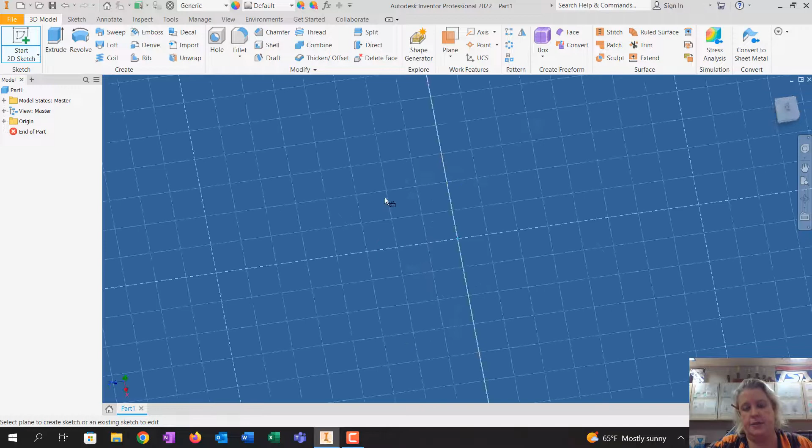So I'm going to do start 2D sketch. I'm going to pick the XZ plane, which is the top plane. I'm going to draw the top circle that makes this thing, and it is a 1 3/4 inch diameter. So I'm going to dimension this to 1.75, and I'm going to finish the sketch.

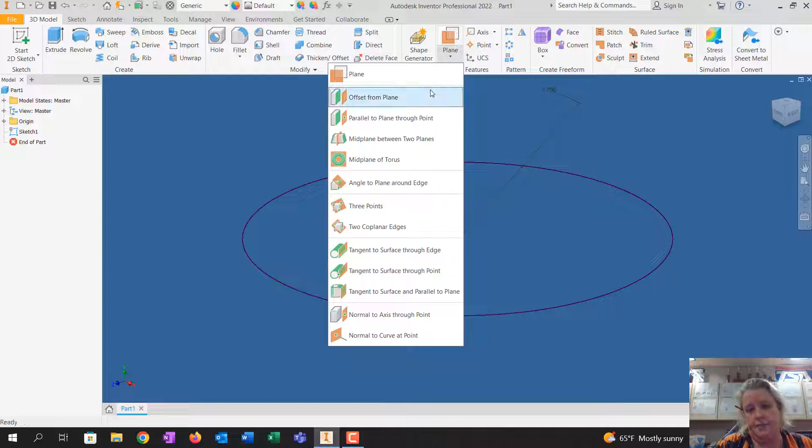Now I'm going to click on plane, offset from plane. I'm going to come to the origin and find that XZ plane. Notice the arrow wants it to go up, but I want it to go down, so I'm going to do negative. The height of this thing is 1 1/4, so I'm going to type that in. And notice here the plane is below it.

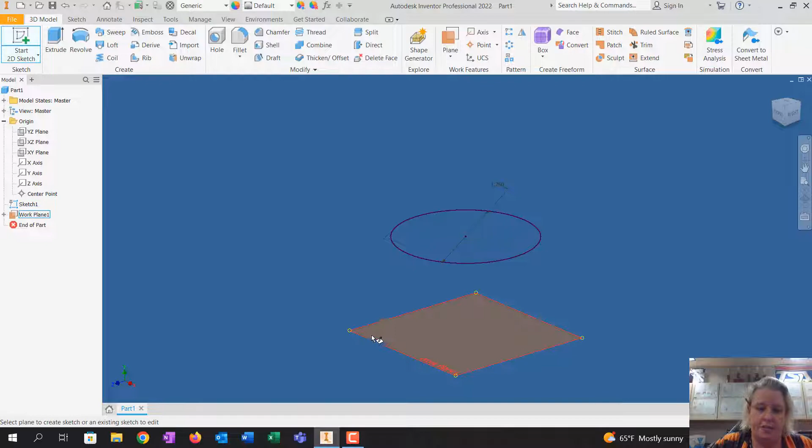Start 2D sketch, make sure you catch the edge of your work plane. Go ahead and project geometry by clicking on project geometry and that circle, and now you can share that center point. Find the green center point, draw your circle. And the diameter of the bottom circle is 7/8.

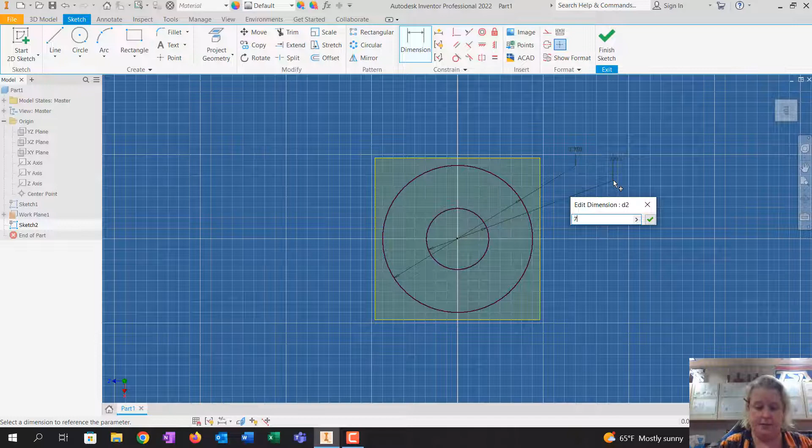We're going to finish the sketch. We're going to click on loft. I'm going to click the top circle and the part inside it so it highlights, then I'm going to click to add. I'm going to click the bottom one and just the center part, and tell it OK. And now I have that cone shape that I need.

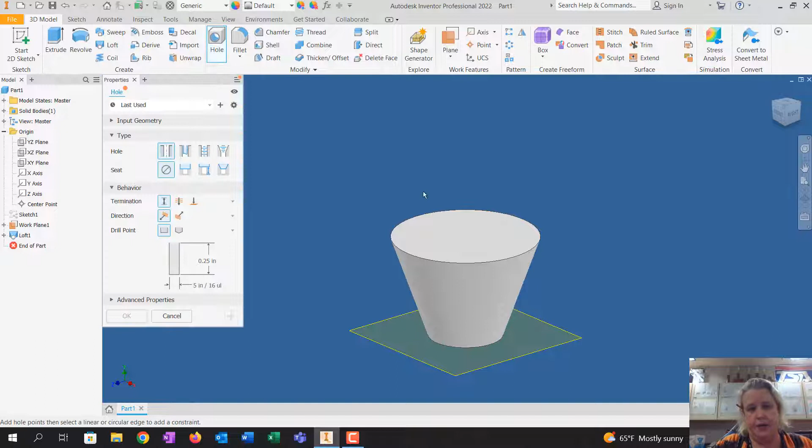It has a hole on top for that big rod that we already drew to go through. So I'm going to click on hole, and I'm going to give myself a top view. This is a concentric hole, so I'm going to click the outside circle and notice it goes to the center. This hole terminates, so I'm going to make sure my termination distance is on, and it is 3/4 of an inch deep, 0.75, and the diameter is 1/2 inch.

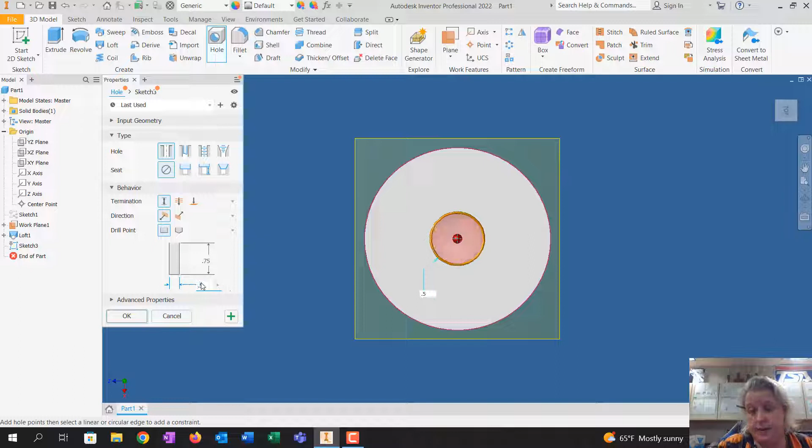See where it says 1/2 inch drill on your drawing? I'm going to tell it OK. There's the hole. Okay, and now it has this peg on the bottom.

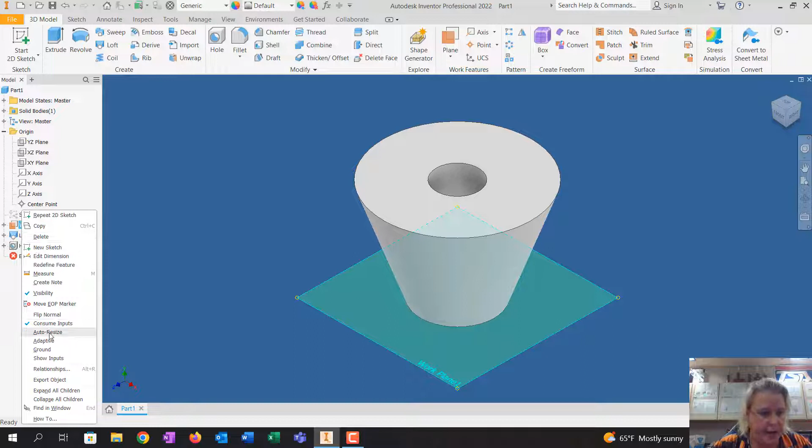So I'm going to do start 2D sketch. You know what, before I do that, I'm going to hide this work plane just to make my life a little easier. So I'm going to right click on the work plane, and turn off visibility. Then I'm going to flip it up. I'm going to do start 2D sketch.

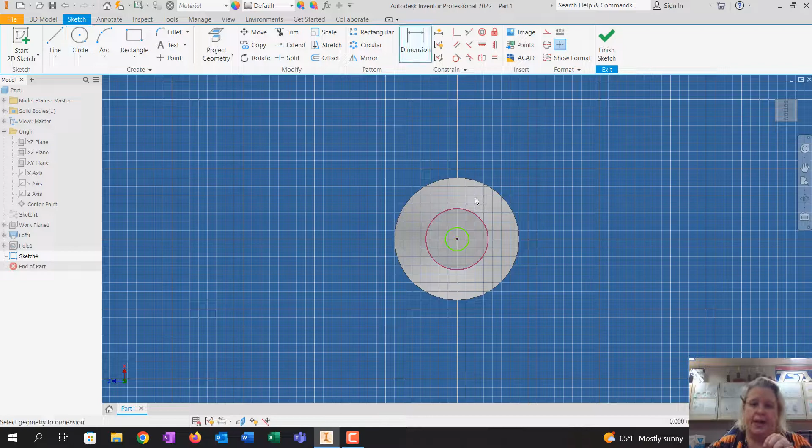I'm going to click the bottom of it. I'm going to click project geometry again, and notice it highlights the bottom circle. I'm going to click on circle, and find the center. And I'm going to draw that little peg that kind of sticks out at the bottom, and the diameter of that thing

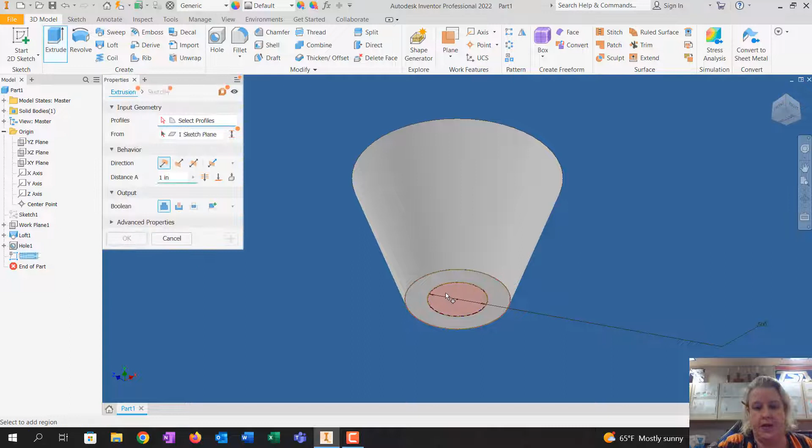is 1/2 inch. And I have to look at the base plate to figure out that diameter. So I'm going to do 1/2 inch. I'm going to do finish sketch, extrude, and that thing is 3/8, which is 0.375. And I'm going to tell it OK.

And there's that center peg. I'm going to put a color on it just so it's easier to see when I assemble it. Okay, we're going to call it center spacer. That sounds like a good name.